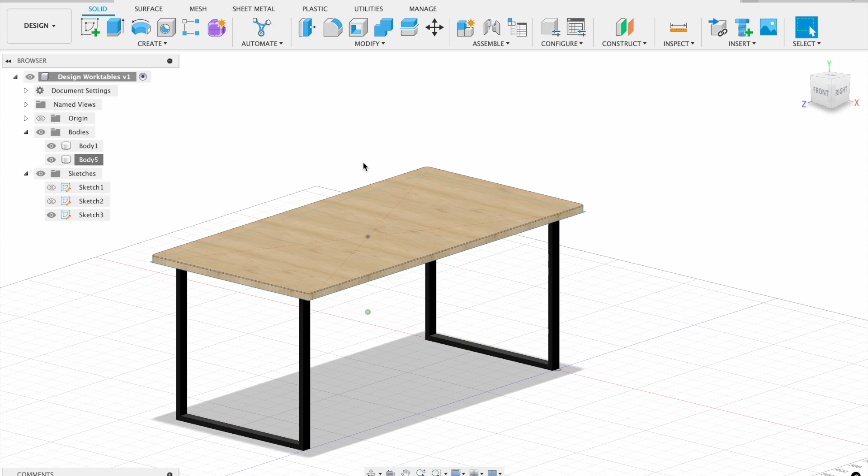This is the actual table we're going to make, a full-sized version of the CAD model. Here's the completed CAD model of that table.

The first thing I'm going to do is create a sketch on the vertical plane, using the front panel to find it. I'll make sure my measurements are in millimeters, and in the sketch palette I have snap turned on.

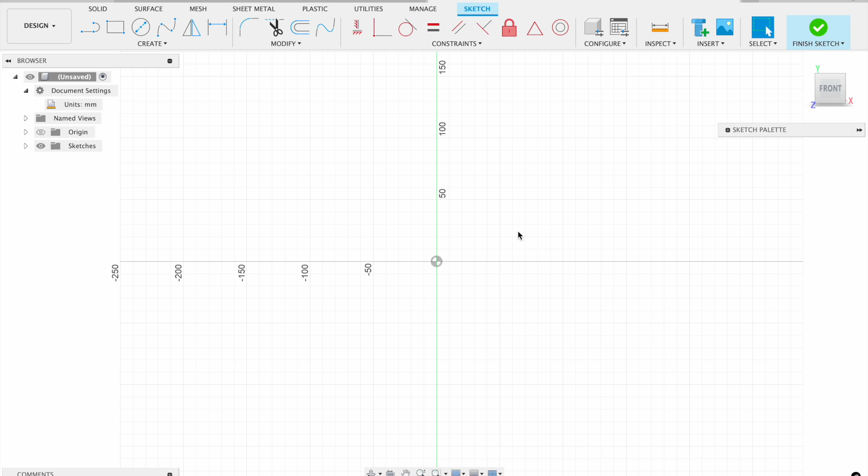My next step is to zoom out a little so I can see more of the plane. You'll start to lose some of the numbers, but that's okay. And I'm going to create a 2-point rectangle.

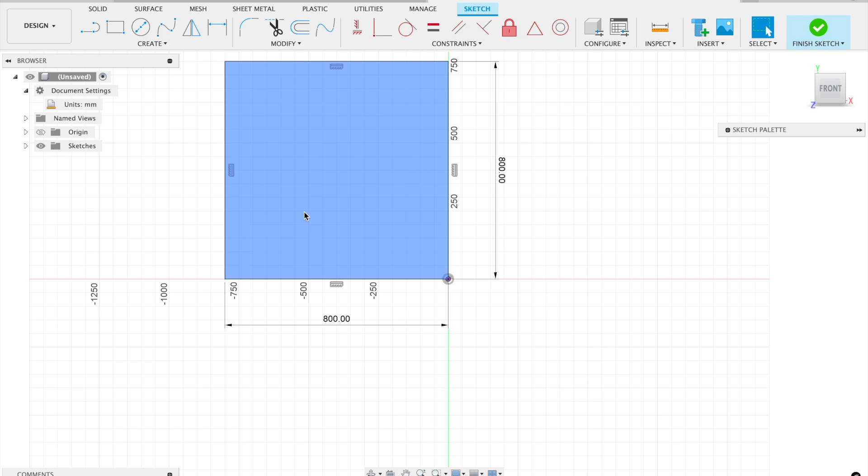In the vertical direction, I'll type in 800 millimeters, which is 80 centimeters. Then I use the tab key to get to the horizontal and also make that 800 millimeters, or 80 centimeters. I'm going to use the create and center point rectangle.

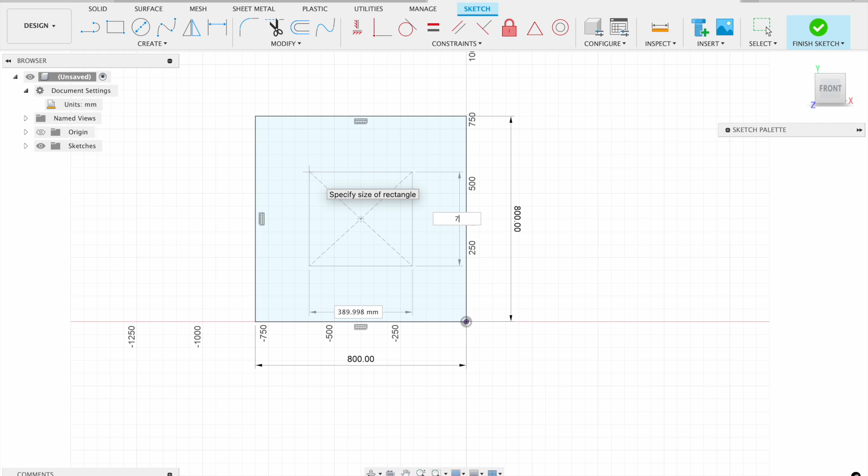I'm finding the center of the square I just drew, and I'm going to make this rectangle 750 millimeters by 750 millimeters, which should be 75 centimeters by 75 centimeters.

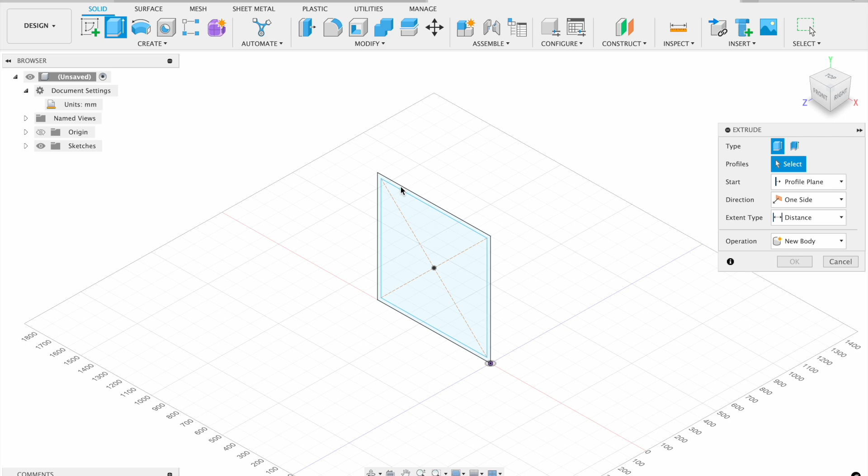My next step is to extrude out this rectangle within the rectangle I just drew, just doing the edges around the outside. I'm going to use the symmetrical function on the extrude, and extrude it 25 millimeters on each side—2.5 centimeters on one side of the sketch plane and 2.5 centimeters on the other—giving a total of 5 centimeters.

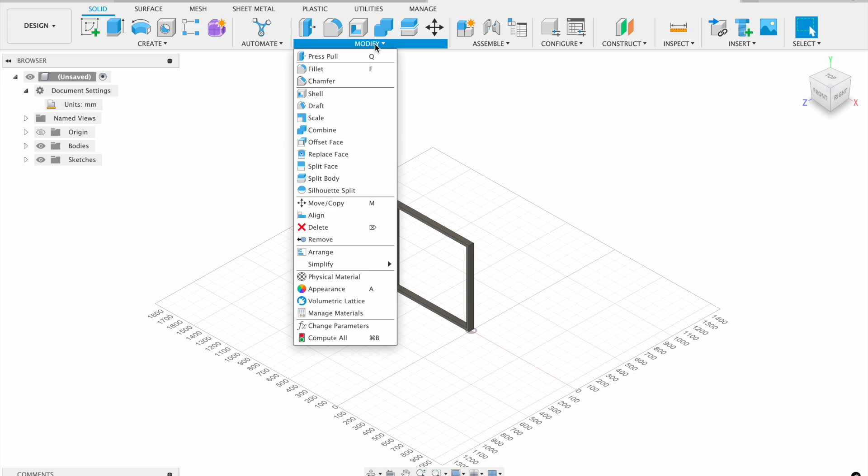I'm going to make a copy of this using the copy function in the move, and move this out 1,800 millimeters, or 180 centimeters.

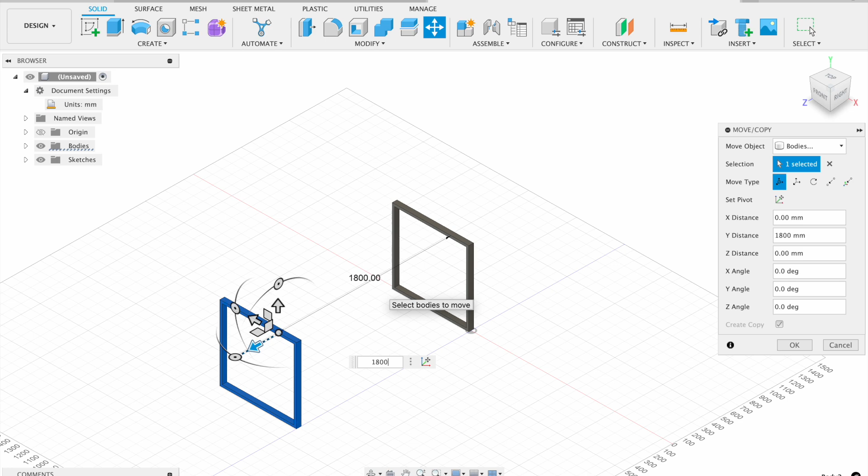So these are my two legs, you can see both sides there. Now I need to do these cross pieces and also connect them to the legs.

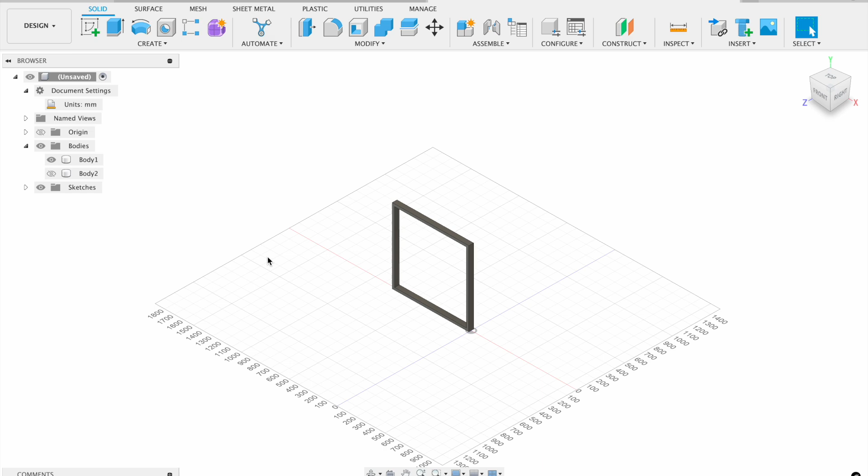I'm going to turn off the second body that I just created, the copy, and sketch on the surface of my first leg. You'll notice it turns that light gray color, and you want to make sure you're selecting the correct surface, which I just picked there.

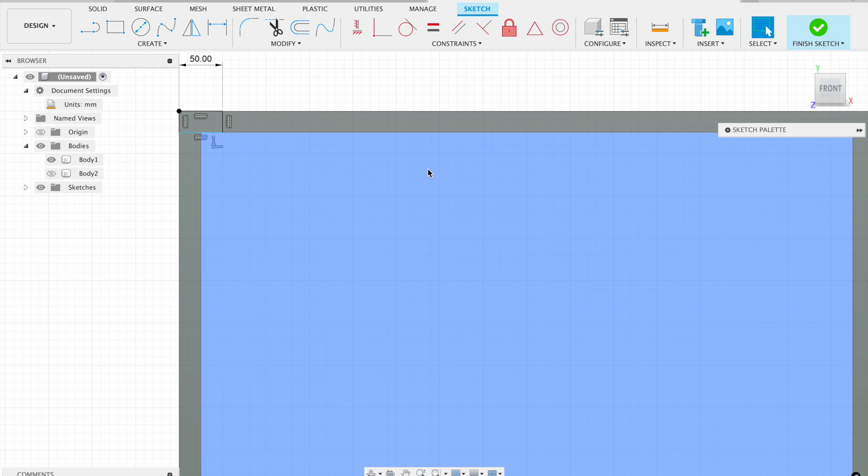I'm going to make a 2-point rectangle, starting in this top corner and coming down, and it needs to be 50 by 25. Then I need to go over to the other side and create a 2-point rectangle that is 50 by 25 in the other corner.

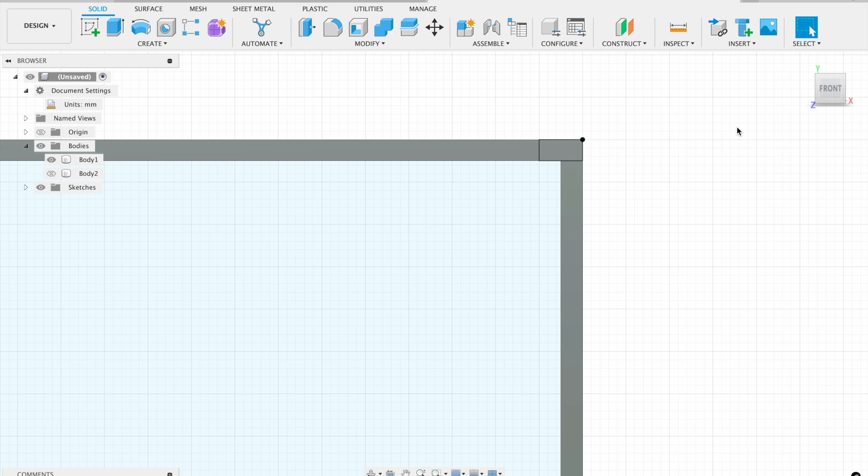This is where having snap is very helpful, because it'll often snap to the correct place you want it to. I'm going to finish my sketch, hit the home key, and then extrude out these two rectangles I just drew by selecting them both.

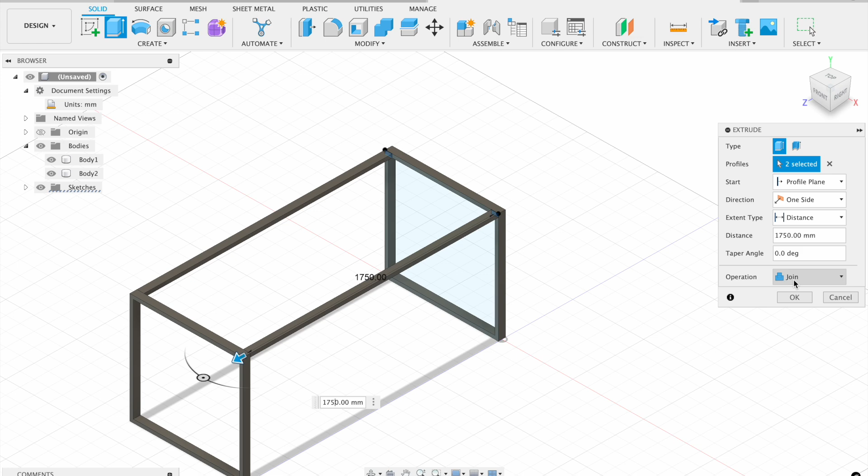I turn back on the second body, and I'm going to extrude this almost all the way. If you extrude it too far, it'll start to do that cut where it turns red, but I need these to be 1,750 long. Then I use the join operation. That's the frame on the bottom of this table, the black frame.

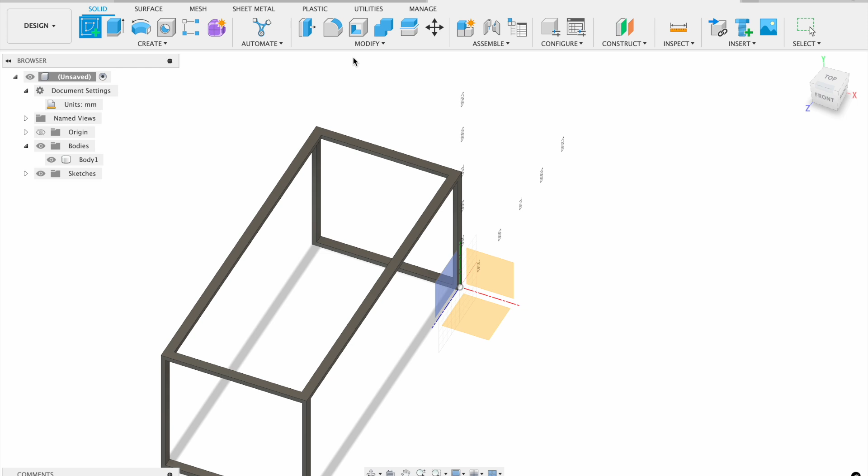My next step is to draw the tabletop, so I'm going to sketch on the top of that frame, and again you should see it turns a lighter gray.

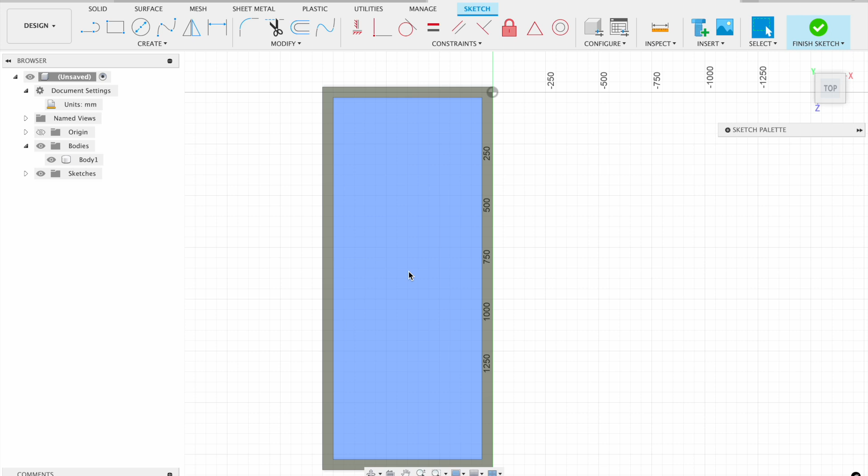Once again I'm going to use a center rectangle. I'm just trying to find the center of this—you can kind of eyeball it. I need to find a line that's in the center, and once I've located it, I'm going to use the center rectangle.

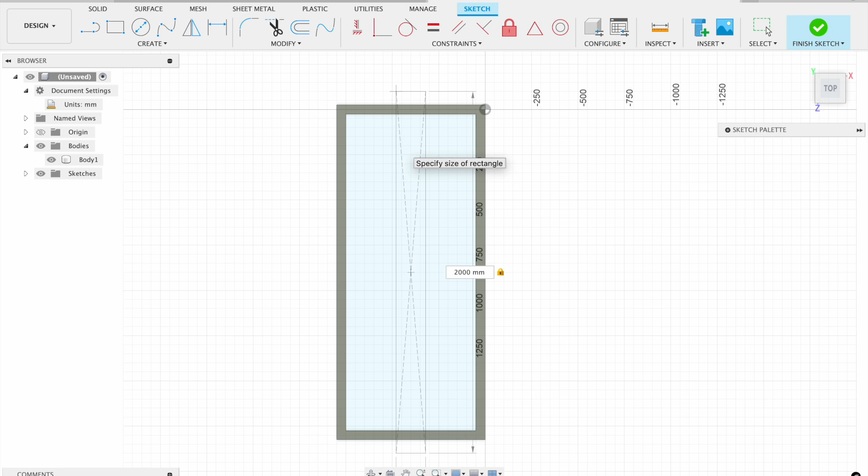I'm going to select the center and start pulling this rectangle. I need it to be 2,000 long by 1,000 wide, so I hit the tab key after typing 2,000 in the length, go to the width, and type in 1,000. You can see this is centered nicely on the top of that frame.

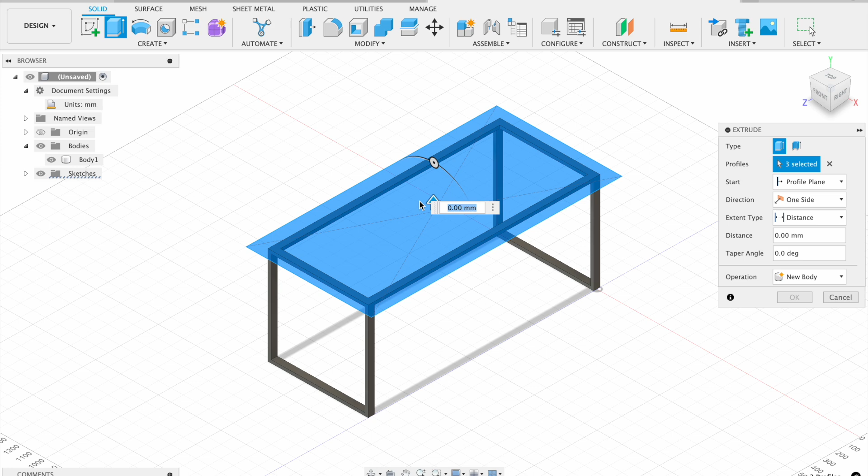I finish my sketch, and then I need to extrude this. It's going to want to extrude in different parts, so I'm selecting 3 parts. I want to extrude this 35 millimeters, and I want it to be a new body because the tabletop is a separate piece. This is pretty much the entire table.

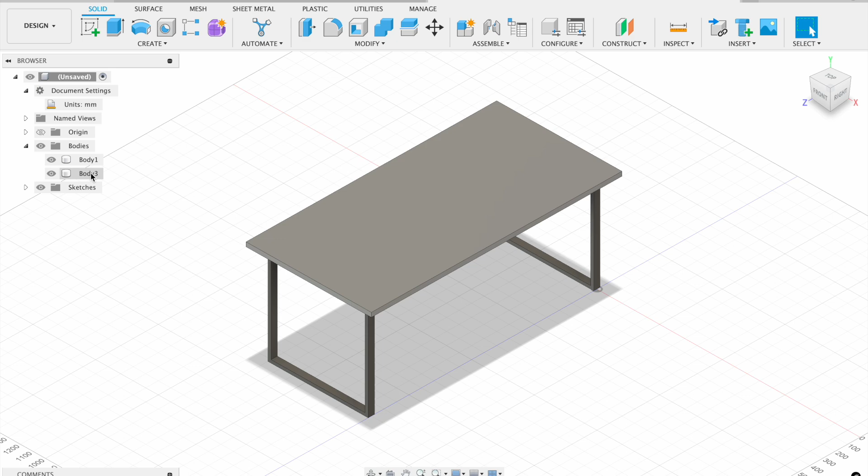The only thing I have left to do is add some appearances. I'm going to go over to the bodies, select the top—body number 3—and go down to physical materials. In the list, I scroll down to wood and find white oak, then drag that onto the tabletop, which makes it into a nice oak surface.

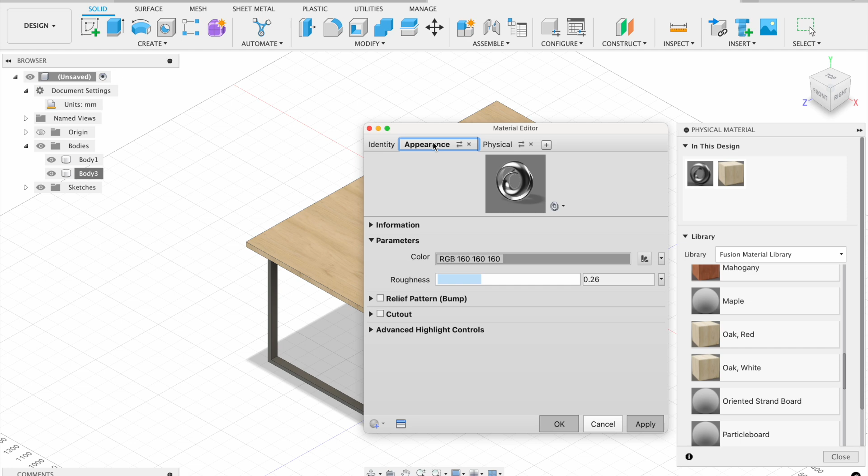I also want to change the steel legs. Steel is already selected, but I want to change the appearance, so I choose advanced, then in the Pantones find black—doesn't matter which black color you choose—and click OK. So now those legs are colored black, which is the correct color. I can hit escape to get out of my materials.

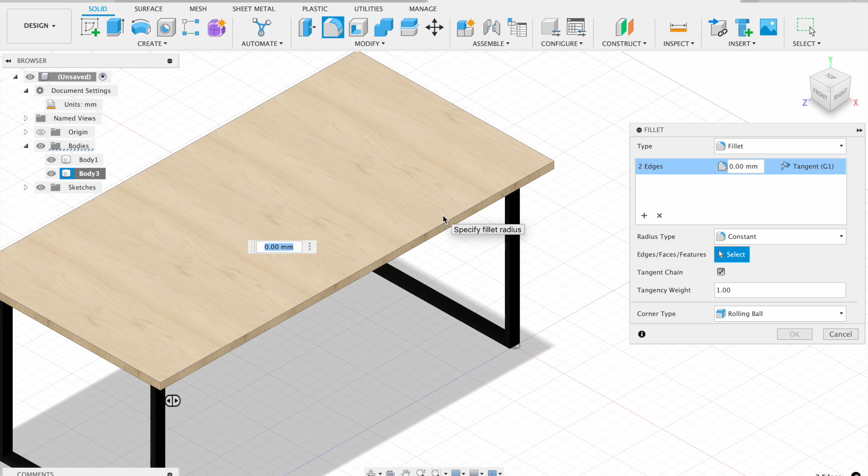My next step is to fillet some of the edges because they're too sharp. I'm going to use the fillet function, select the corners, and fillet this by 20 millimeters.

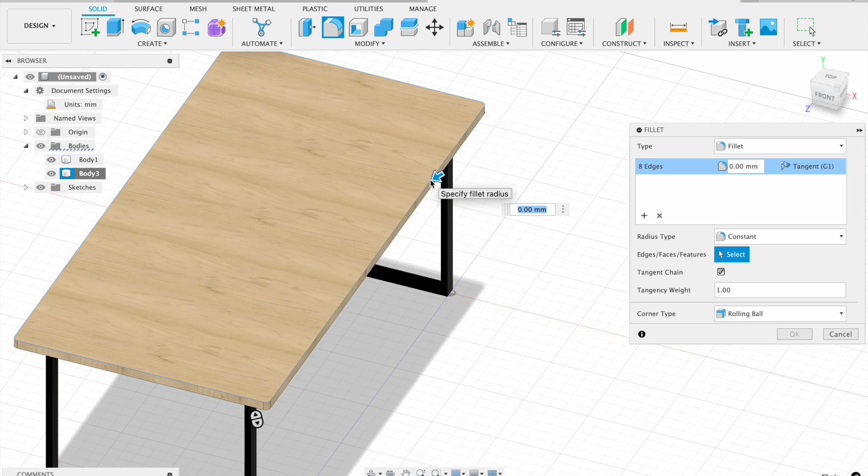So now our corners are rounded. I also need to round the edges, so I select one of the top edges and round this 3 millimeters, which gives a nice fillet on the entire table. All right, and there's your table. Thank you for watching.